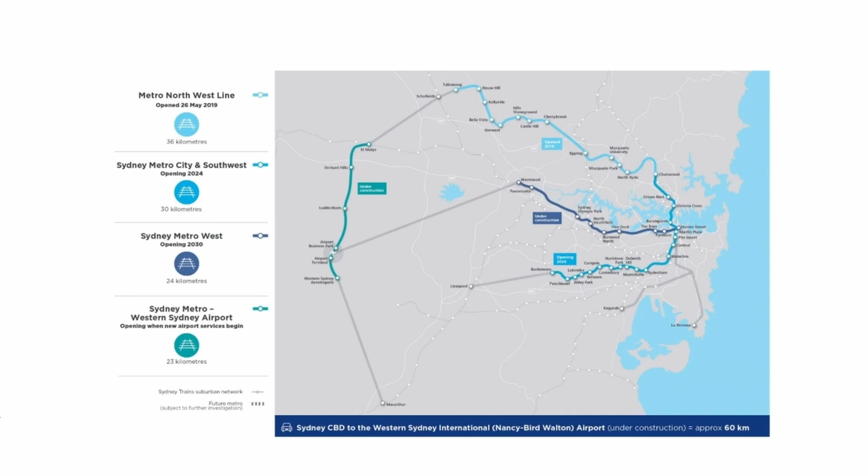Our next project, which is now underway, is Metro West. Metro West runs from Westmead through to the CBD. It's a 24-kilometre underground driverless metro. Project is progressing really well. We have our approvals in place. We have our first major tunnelling contract awarded. The next one's in the door. We're currently under assessment. Again, a very, very big and exciting project.

Last but of course not least is the Western Sydney Airport. This is a new railway that will serve the new airport. This will connect at St Mary's, it will run down to the new airport and then onto the new city at Aerotropolis. Again, a project that's only been going for a little while. We have two of the major tenders in and under assessment. So we have the tunnelling tender in, the major infrastructure, and yesterday we announced the shortlist for the major system services, operations and maintenance package. So again, that's where we are.

So what I'd like to do this morning, I've got quite a few slides, which everyone said I wouldn't get through, so I'm going to try and go as quickly as I can to get through them, to show you something, what we've been up to.

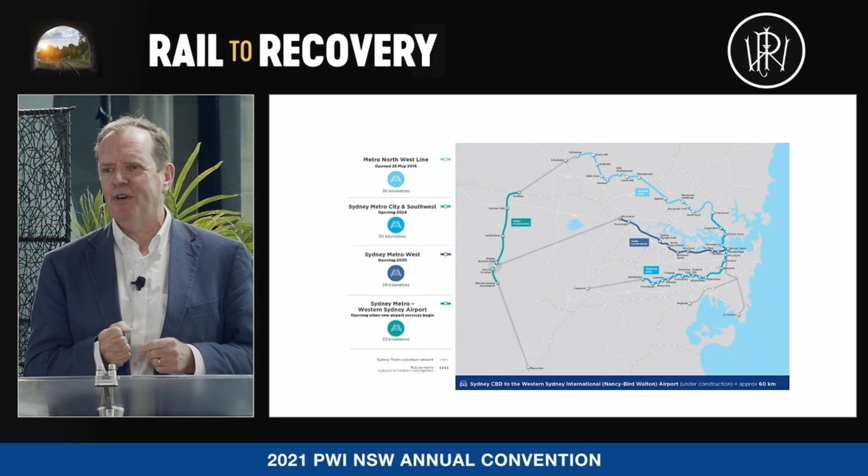I think it's fair to say, I love the title Rail to Recovery. It's been a shocking year. Let's face it, it really has. In fact, shocking two years. How do we actually get out of this? And I think rail has a really important part to play and the mega project.

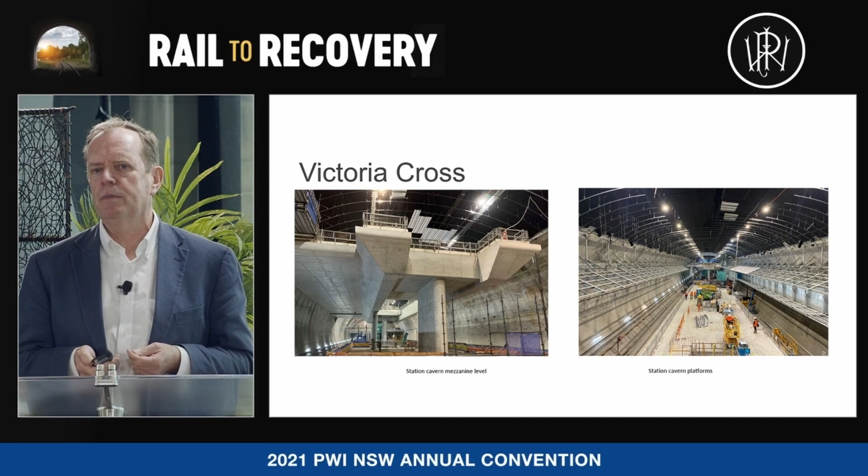So I'm just going to run you through some of the fantastic achievements the team have done despite COVID. Victoria Cross. This shows you probably one of the most iconic railway stations around. Not finished yet, but when people visit Victoria Cross, you'll see now why North Sydney will actually become part of the CBD. Fantastic station to support that really important business district.

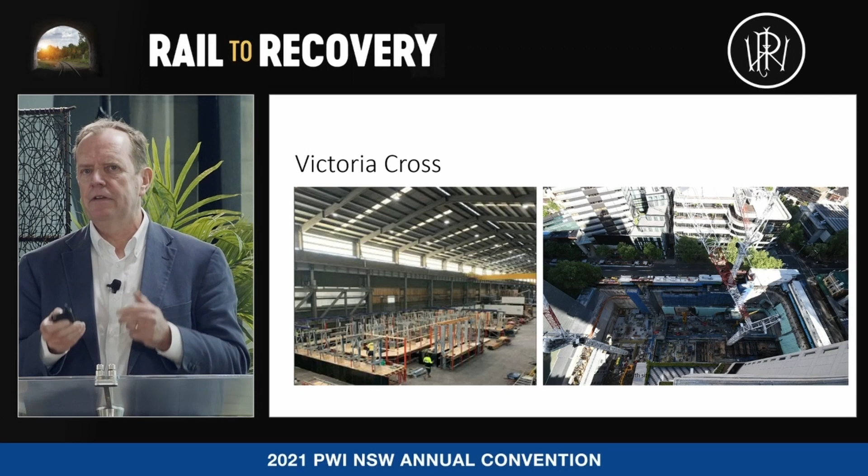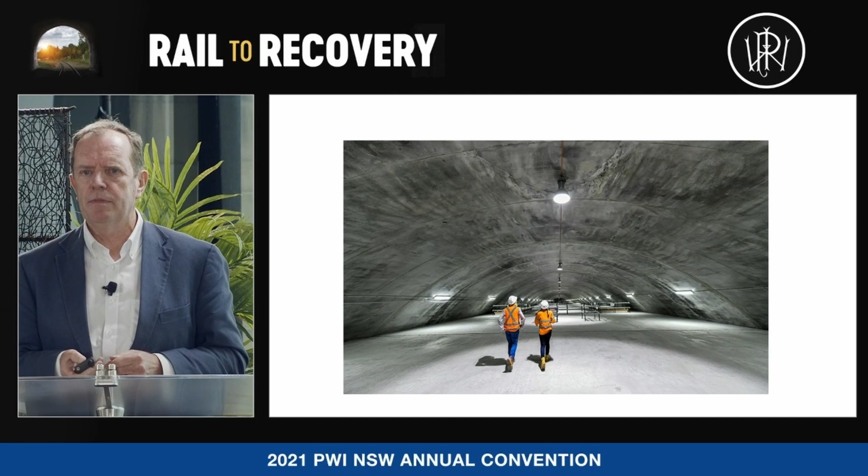Barangaroo. For those that don't know what's been going on, we relocated Barangaroo Hickson Road onto a bridge. This is what's happening underneath. This is the crossover cavern, which we've recently completed and handed over. Again, a fantastic achievement. Very, very difficult conditions down there to build in. Cavern's now been completed, concreted, and handed over to the fit-out contractor.

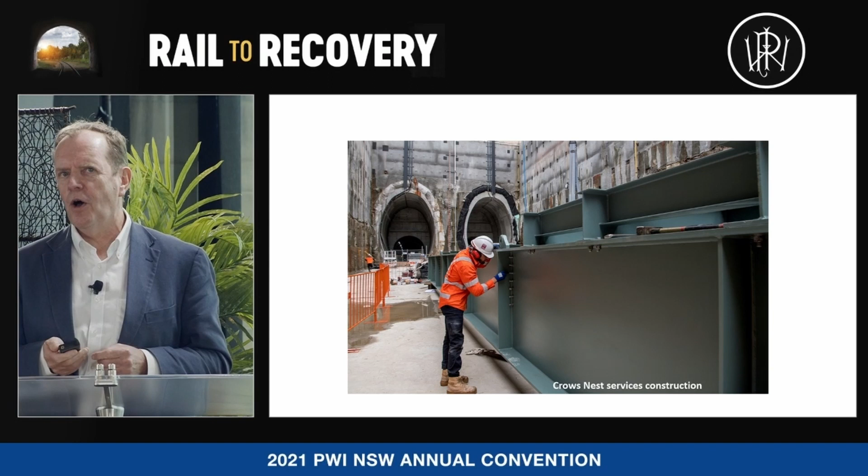Crow's Nest. For those that go past Crow's Nest, off the Pacific Highway, an awful lot's going on in the hole. Some of the major beams that are just being assembled there for erection shortly.

Central Station, this is a few months ago. Central Station looks nothing like this anymore.

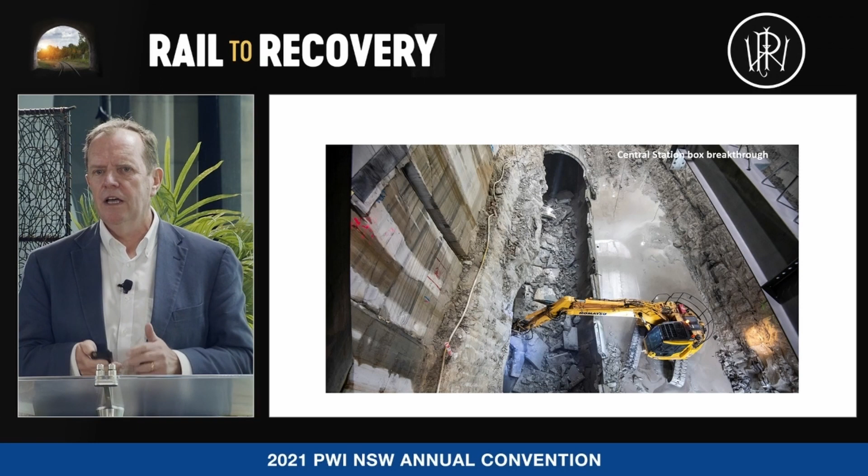At Central Station, because of the programme and building in the heart of the busiest railway, we did a top-down construction for the station. So instead of building the box and having the tunnelling come through, we let the tunnelling come through first and then dropped the box on top of it. Haven't done that before, it worked really, really well. It gave us the ability to get all the surface work done on the station whilst the tunnellers were busy underground. Again, a really good outcome.

Waterloo Station, again very similar to Crows Nest, a large hole in the ground currently coming out. Very pleased to announce we've just got the track access. On the City and South West, to give you an idea of progress, 80% of the track has been laid. So one of the key things now is to actually get through some of the stations. We've recently just got access at Waterloo. Fantastic job by the men and women working on that project day and night.

Western Sydney Airport, again early works have started. We're expanding the St Mary's commuter car park. We're very lucky, someone who built it earlier recognised that maybe you need to expand it and put the foundations in suitable for an extra 2 stories, so we're getting on and doing that. We're also doing a lot of utilities and site investigations. What's interesting about Western Sydney Airport, unlike the city projects, we're looking for utilities rather than trying to avoid them. So that's another different thing we're doing out there.

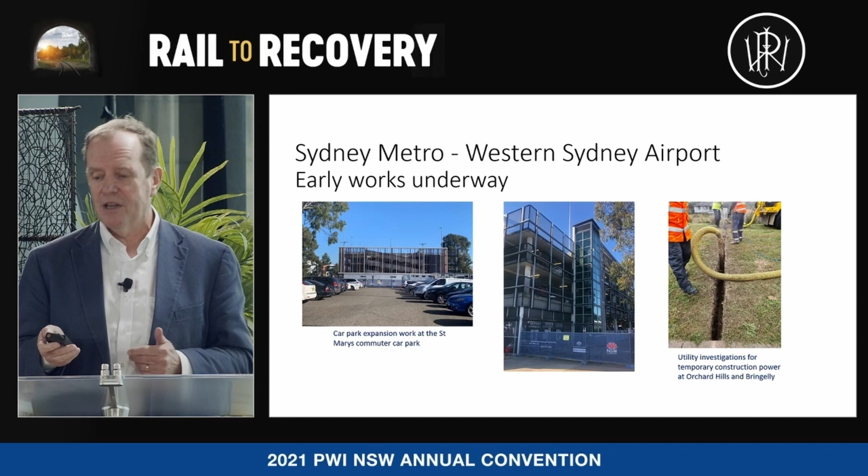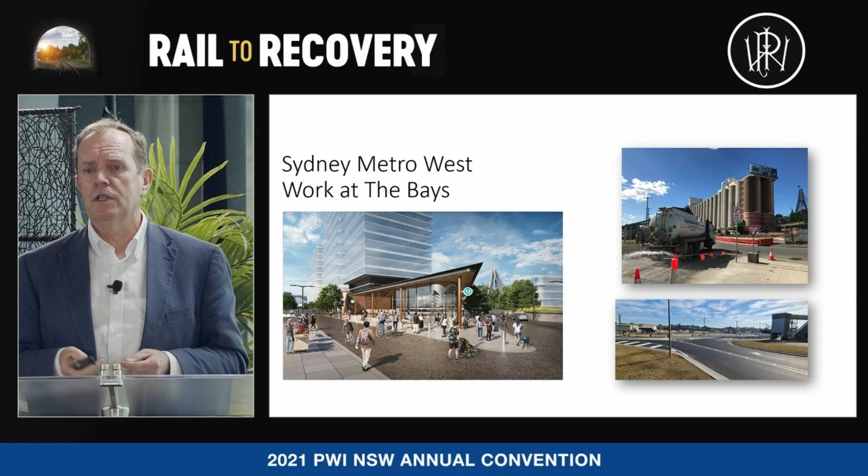Metro West, again we've awarded the major tunnelling contract. That will run from Bays through to Sydney Olympic Park. We've currently done a lot of work at Bays so we can actually get that underway, and we're hoping to see activity starting before the end of the year at Bays, which will be the site of the first tunnel launch, to be completed by the end of next year.

I'm just going to run a short video of the Bankstown Line now, which I think you'll enjoy, and I'll then talk a little bit more about it.

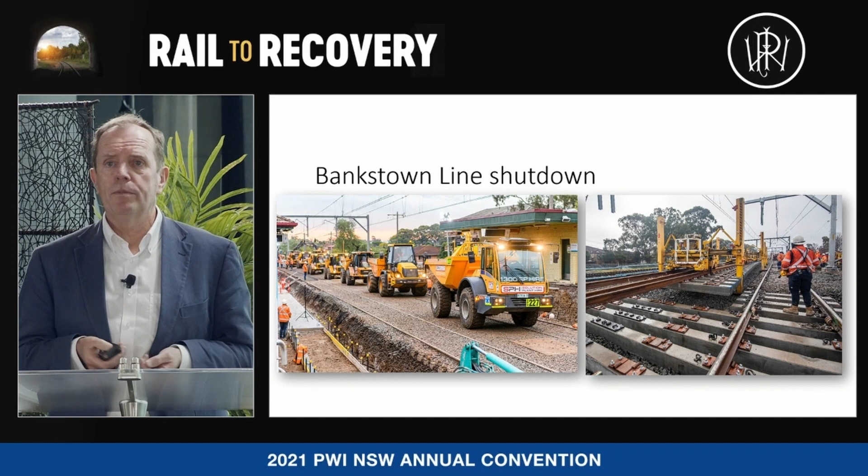So the shutdown, just the equipment alone, a huge amount. Every piece of equipment from all over the state was brought in to move things. You can see here the number of people, again working in a COVID-safe environment, but just the quantity of people on those sites and the amount of work happening. 18 platforms were demolished and rebuilt in that period.

Community, this is Canterbury, you can't get closer than this. The great thing is we enjoyed the community support. Yes, we have issues, but they were fantastic and worked really closely with us.

Again, another example here, this is in the middle of the night, work going on, heavy rock breaking. Again, people were very, very understanding of what we had to do. Some statistics now, we were engineers, we love numbers.

18,500 tons of material, and then we had to replace 18,000 putting back. So again, huge material movements.

233,000 hours worked, 1,800 people. The logistics, I must admit, the coffee shops did love us in that area for 2 weeks.

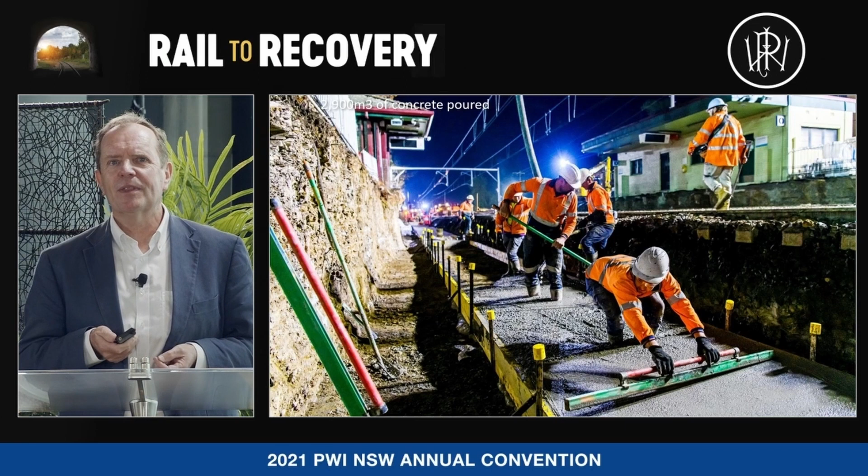They did great business, and bacon and egg rolls all day long, they went gangbusters. Concrete, we put in nearly 3,000 cubic meters, and it wasn't just done during the day, it was day and night. Fantastic achievement by the team.

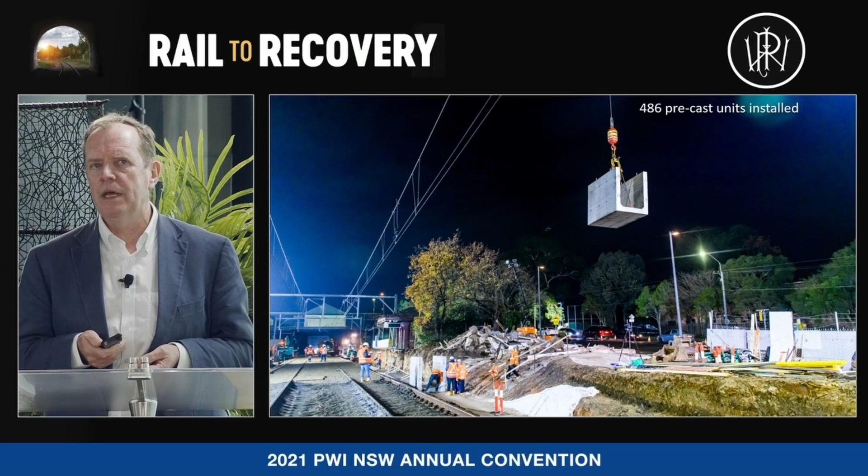486 precast units, these are for platforms. All pre-built, had to arrive on site on time, lorries, deliveries, craning them in. This wasn't an artistic shot, this was in the middle of the night bringing them in, just to try and minimize the impact to the community.

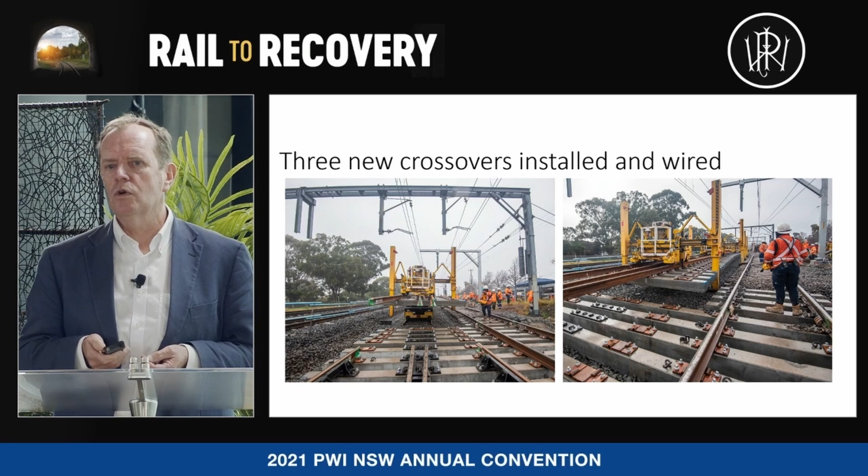3 new crossovers installed and wired, 300 meters of track, 0.5 kilometers of overhead wiring, 140 track welds. And of course, for all those that work on possession work, it rained. Boy, oh boy, did it rain for a couple of days, but the guys kept going. A great achievement for the workers there.

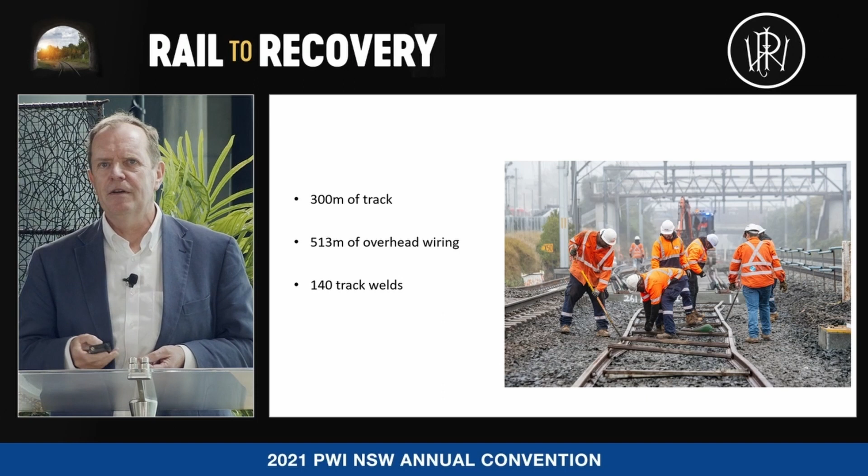10 kilometers of cable containment and ducts, all put in this period. 376 piles. So that was the Bankstown Line.

From my point of view, I can only thank our delivery partners, station contractors, the Laing O'Rourkes, the John Hollands doing the works. A really, really amazing achievement, and it's a sign of what our industry can do when it sets its mind to it.

What I wanted to do in the last few minutes is talk about some of the things I've seen going on, and one of them is innovation. As an industry, we often get referred to as old-fashioned. I think that's a bit unkind. I think we're actually very innovative. But I want to talk about one of the things we're doing just as an example.

On the Northwest Rail Link, we introduced platform screen doors. The first in Australia, they are used elsewhere.

I think what a lot of people don't appreciate about Australia is that we have one of the highest, most rigorous DDA compliance requirements. When you get onto a London tube, they have t-shirts saying mind the gap, or try not to let your child fall in the gap. Our standard is a height difference of no more than 12 millimeters, that's about that much, and a gap of no more than 40 mil. It is the highest standard anywhere in the world.

And what's great is it's been achieved on the Northwest. That's fantastic. But we're going to apply the same standard to a 126-year-old railway. So one solution was to knock everything down and build straight platforms. That is a solution, but what we're looking at now is keeping the curvature of the line, simply because it's in good shape. Why would we change it?

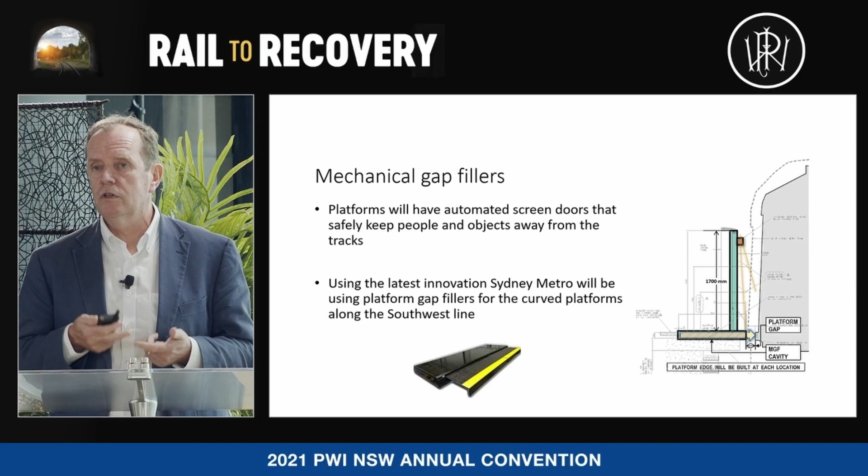And we're going to be using not only platform screen doors, but gap fillers. We're currently out to tender, so I can't say who's won the contract, but we've got 3 leading suppliers. The interesting thing is these aren't new to the rail industry, they just haven't been adopted very often. We've got 3 suppliers: one's from Switzerland, one's from Japan, and one's from Korea.

They are used in Korea and Japan. This is an area we haven't done before, but we see it fundamentally changing, not just in Australia, but around the world, getting rid of that infamous gap problem. So that's some work we're doing, and we're very excited by it. The new norm - gosh, what does a new norm look like?

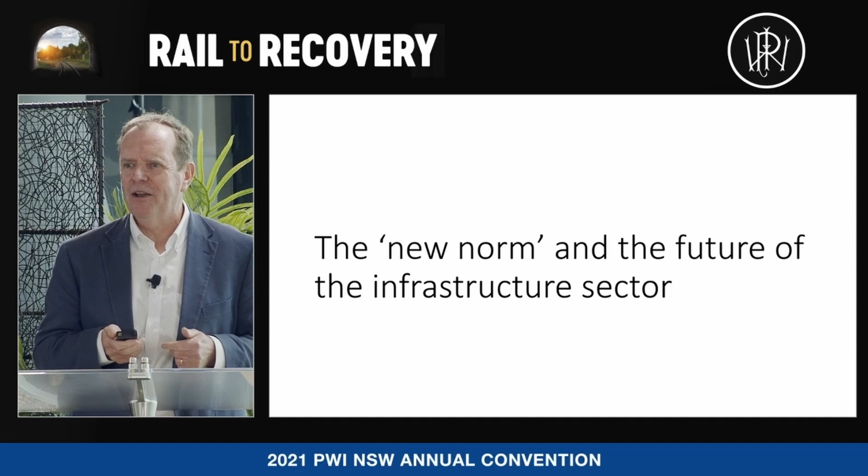It's very difficult to imagine. I took John's comments on Teams - I'd read about it, I'd heard about it, I never knew how to use it. And if you work in government, you can imagine someone saying, we want everyone to work from home, and you'd have your subcommittees, you'd probably have about 2 years of consultation.

Three days later, you're working from home using this new program called Teams. Remarkable, the whole industry did it, and we've worked out how to use it. For us, it's been really interesting - the hybrid model. Even when we came back to the office, we still had a lot of people working from home, working out the way you work.

How do you talk to someone when you're in the room and they're on Teams? Getting people to think differently, how do you present well on these things? And also how to keep staff engaged. We've had Teams trivia nights, Teams cocktail, we've even got one of our teams doing team cooking, which is quite bizarre, but it's trying to keep that environment. If you're not there together, how do we keep people together?

International collaboration - this is something I did recently. I got this invite: would you like to be on the panel for High Speed 2 Learning Legacy? And I thought perhaps there was a ticket to London, but not in this environment. So again, I went along - you can see me there. I actually had a tie on that day, which was pretty good. It was at midnight, I had jammies on below, but I had my tie on up top.

But again, it gave us an opportunity to contribute internationally, and I was really proud - you know, it's an Australian, and we were the international flavour about what our mega project's doing and how we can help them and how they can help us work in a better environment together.

One of the things we're really proud of in Sydney Metro is we've taken on a new approach to working with our design companies. Traditionally we've worked and had multiple separate contracts. We now have an engineering design solution where we're partnering with Mott MacDonald and a number of other key subcontractors, so that's working well. It's bringing people from all across Australia and also across the world - we're able to bring that expertise in to solve problems on our Sydney particular projects.

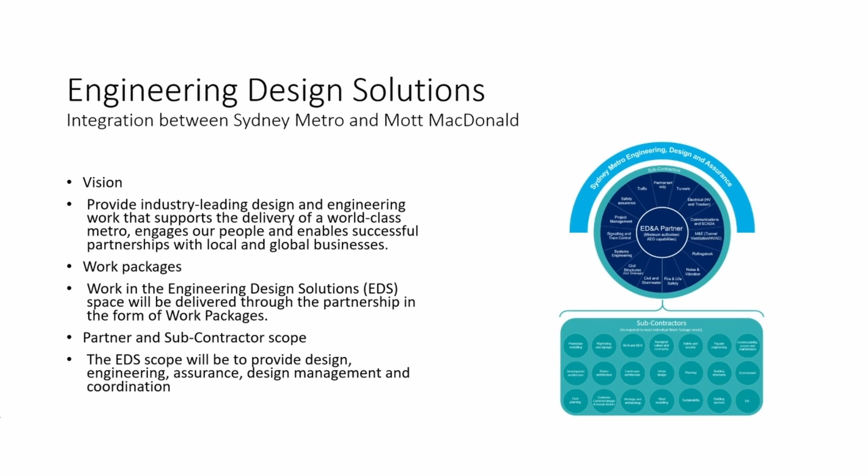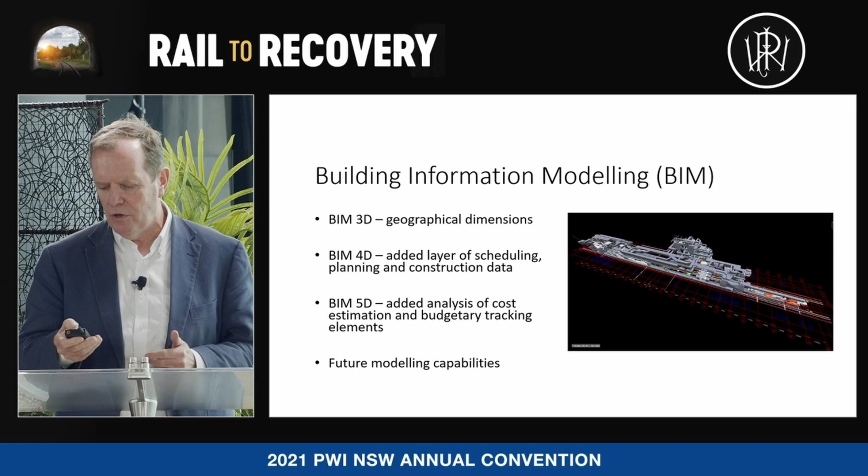And I think that is the end, so I hope you enjoyed that. It was quick - I've even got two minutes to spare, so I win my bet with my comms people, who thought I'd never get through 35 slides in 18 minutes.